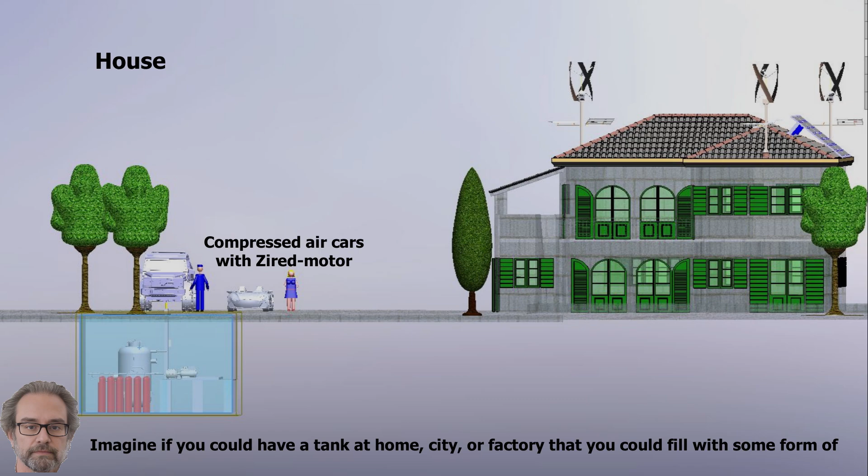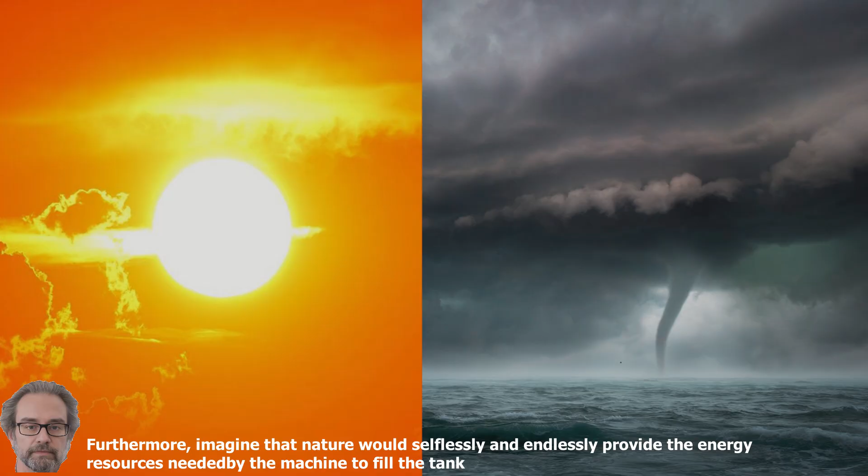Imagine if you could have a tank at home, city, or factory that you could fill with some form of energy 24 hours a day, 7 days a week, using just a new, near-silent machine. Furthermore, imagine that nature would selflessly and endlessly provide the energy resources needed by the machine to fill the tank, without you personally having to toil, compete, or pay for the supply.

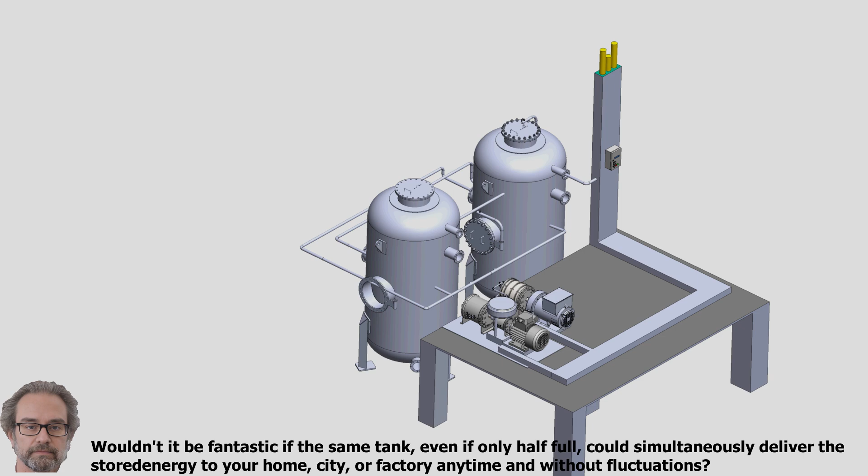Wouldn't it be fantastic if the same tank, even if only half full, could simultaneously deliver the stored energy to your home, city, or factory anytime and without fluctuations? And all this with the help of a second, also almost silent and very powerful machine.

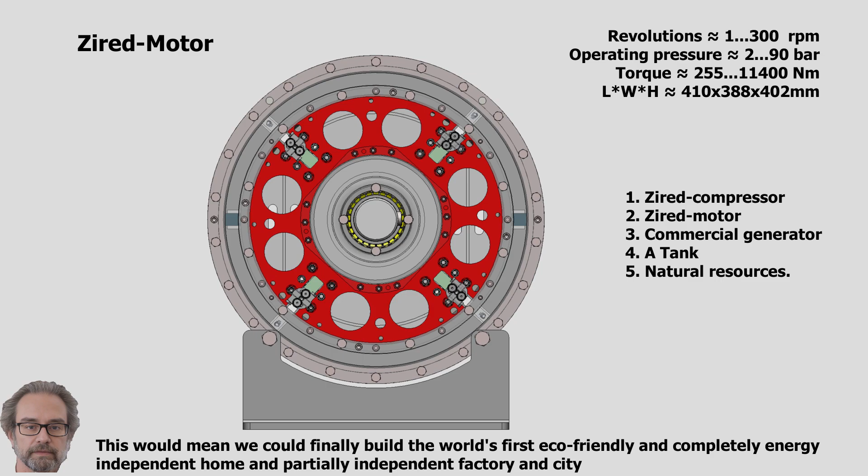This would mean we could finally build the world's first eco-friendly and completely energy-independent home, and partially independent factory and city, using just two specialized machines, the Zired compressor and Zired motor, a commercial generator, a tank, and natural resources.

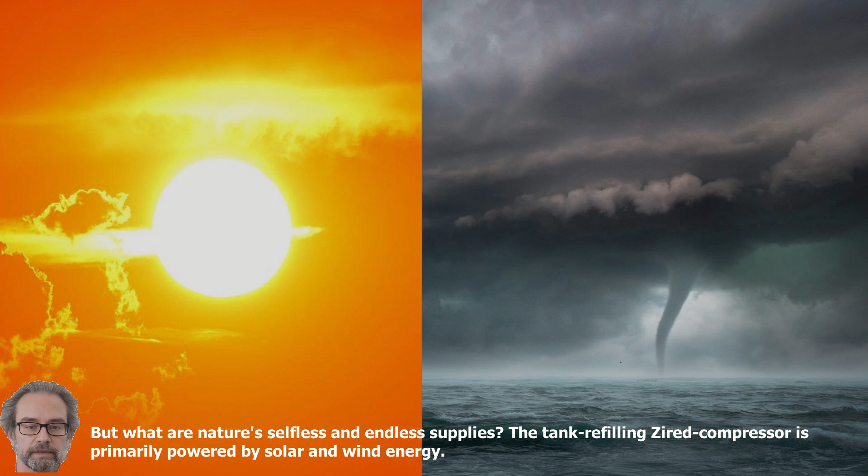But what are nature's selfless and endless supplies? The tank-refilling Zired compressor is primarily powered by solar and wind energy. But what kind of resource could the machine use to fill the tank?

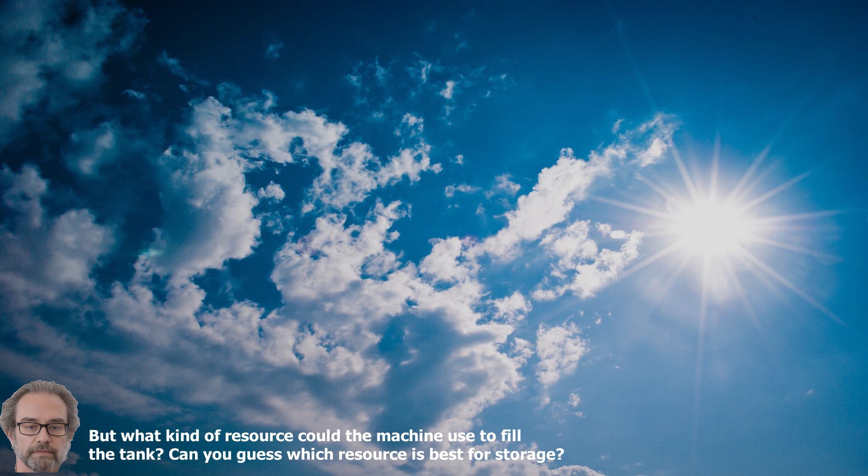Can you guess which resource is best for storage? I don't think it would be so easy for you, although according to the ancient Greeks, this resource is one of the four elements of the world and is also necessary for the survival of all living organisms. Yes, air is the best resource on planet Earth.

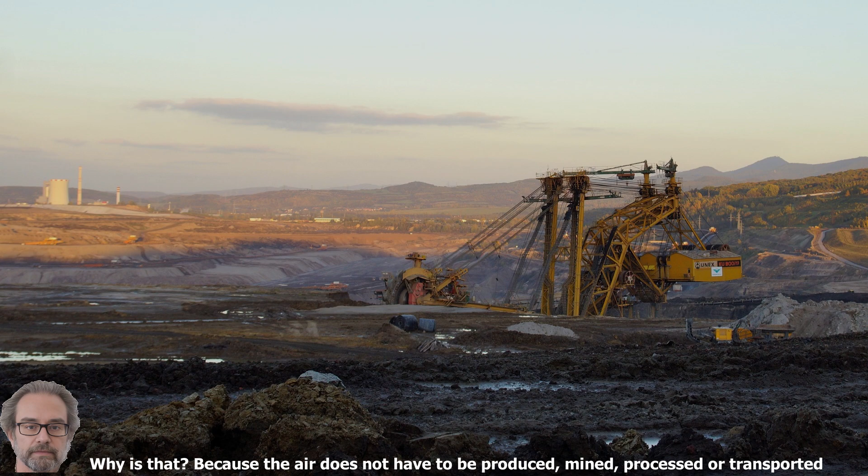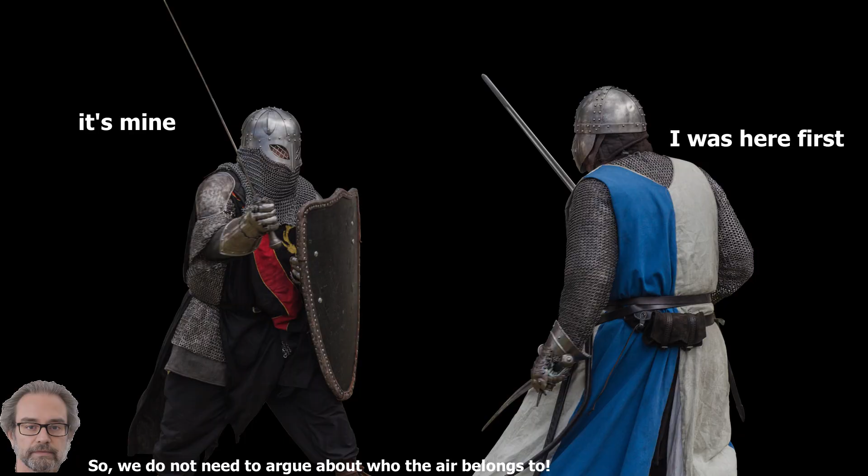Why is that? Because air does not need to be produced, mined, processed, or transported. Air is a gift from nature and is available in abundance. So we do not need to argue about who the air belongs to.

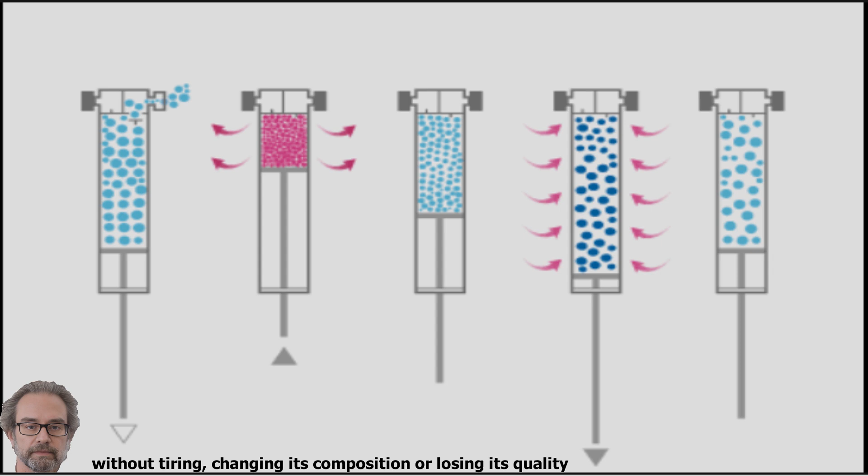However, the best and most important property of air is that it can absorb or release mechanical energy countless times without tiring, changing its composition, or losing its quality. This property of air inspired me and at the same time encouraged me to develop devices that can make optimal use of the properties of energy absorption and release.

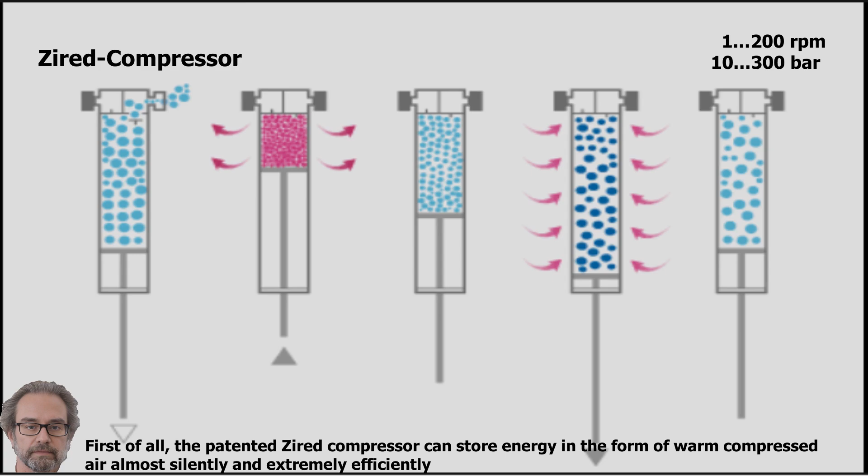First of all, the patented Zired compressor can store energy in the form of warm compressed air almost silently and extremely efficiently. Most importantly, the storage process completely balances out all the fluctuations that renewable energy sources inevitably have.

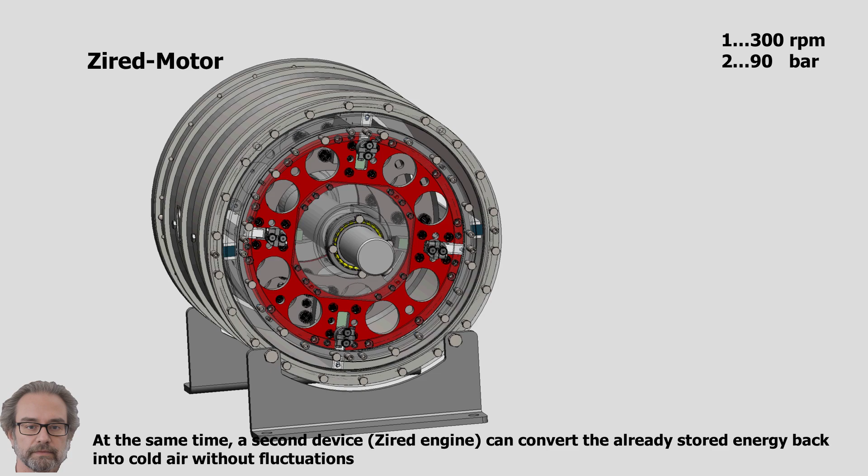At the same time, a second device, the Zired engine, can convert the already stored energy back into cold air without fluctuations. This can then drive a conventional generator or a compressed air car, if available.

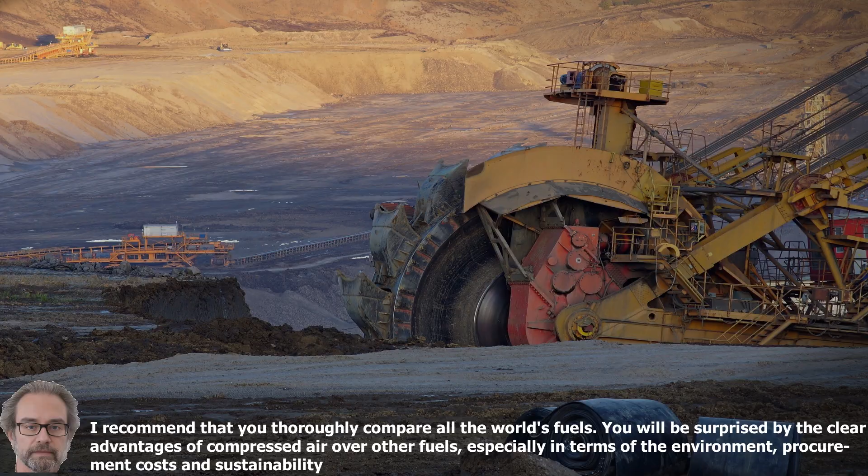I recommend that you thoroughly compare all the world's fuels. You will be surprised by the clear advantages of compressed air over other fuels, especially in terms of the environment, procurement costs, and sustainability.

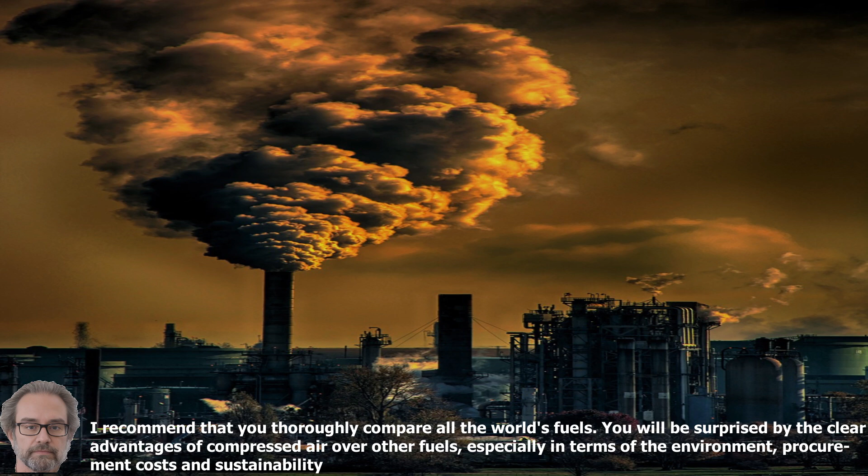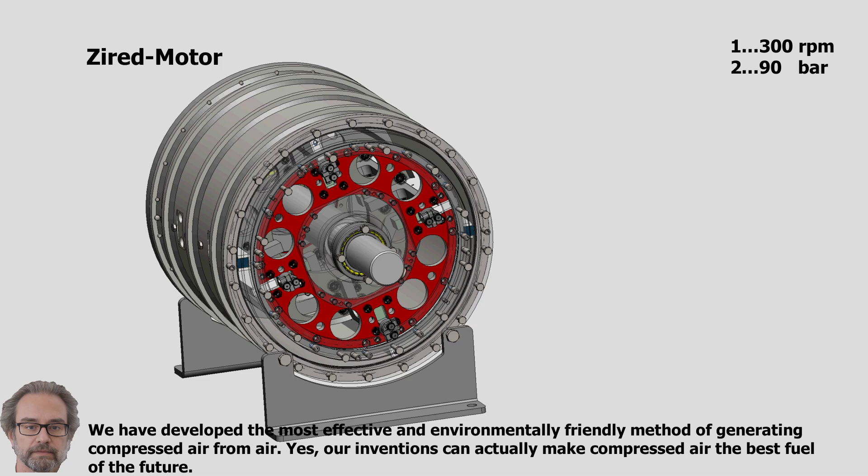We have developed the most effective and environmentally friendly method of generating compressed air from air. Yes, our inventions can actually make compressed air the best fuel of the future.

Our goal is, of course, to unite production sites with consumption sites in order to avoid energy transport. With the Zired engine and compressor, every consumer should be able to achieve energy and mobility independence.

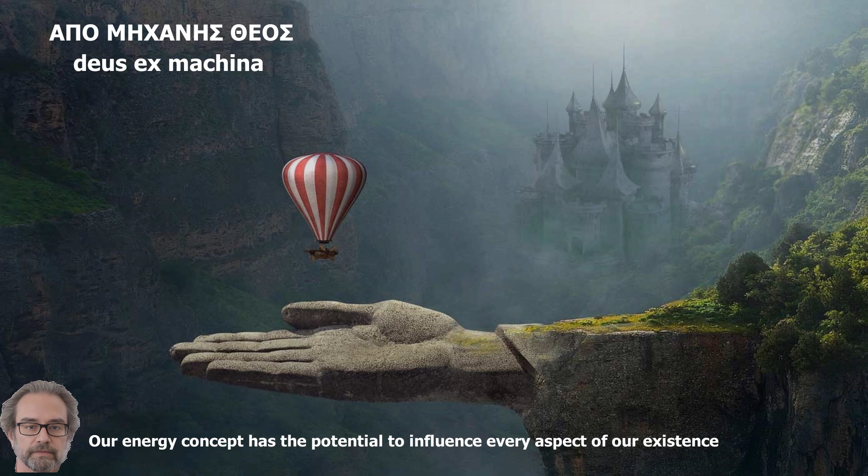Our energy concept has the potential to influence every aspect of our existence. In addition, it will be able to greatly reduce the dominance of combustion energy and resource wars.

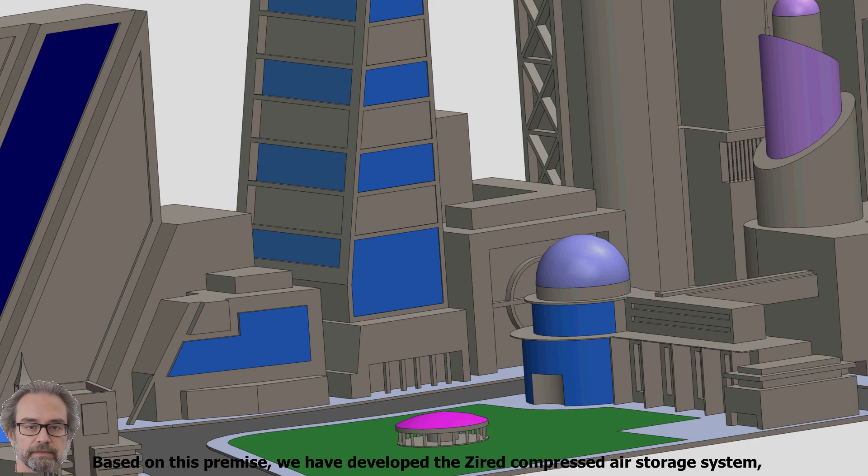Based on this premise, we have developed the Zired compressed air storage system, which is a long-term energy storage system that utilizes compressed air as its storage medium. Compressed air is a form of energy that falls under the category of potential energy.

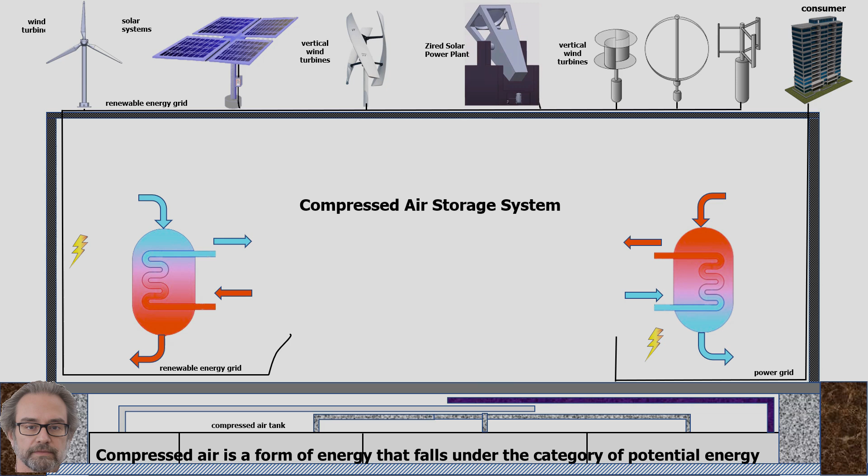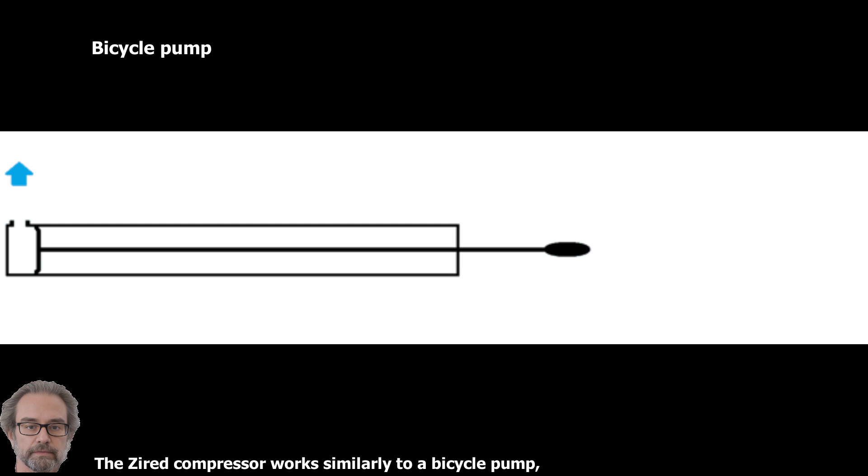We have re-engineered the previously inefficient process of generating compressed air. With the assistance of our two new machines, which have been granted a European patent, we have greatly improved the generation process. The Zired compressor works similarly to a bicycle pump, except that it moves in a circular motion instead of a reciprocating one.

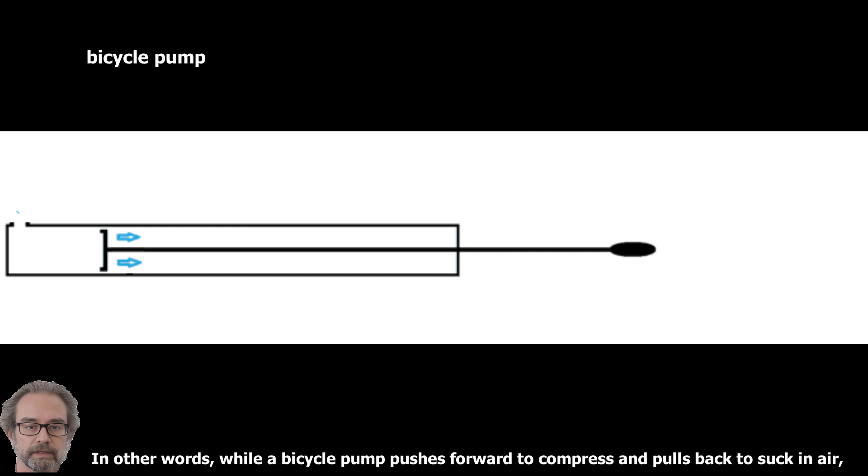In other words, while a bicycle pump pushes forward to compress and pulls back to suck in air, the Zired compressor instead rotates continuously in a perfect circle. This allows Zired to suck in and compress air at the same time.

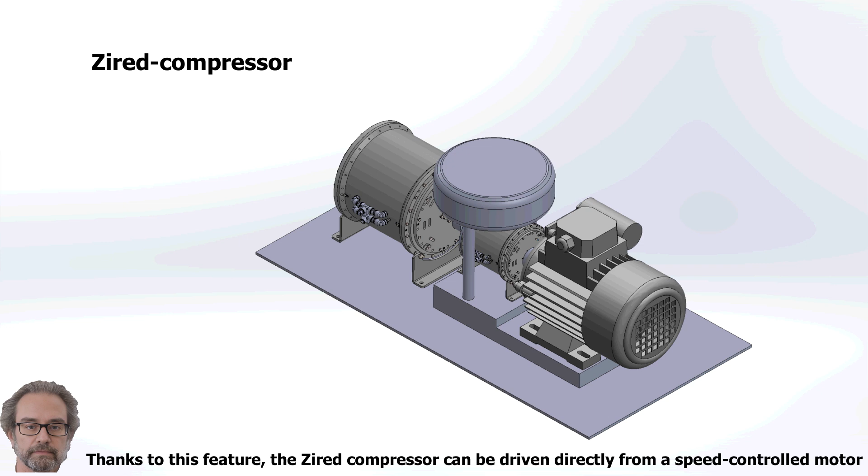The compression does not depend on the rotational speed, as the Zired compressor can compress air even at a single revolution per minute. Thanks to this feature, the Zired compressor can be driven directly from a speed-controlled motor.

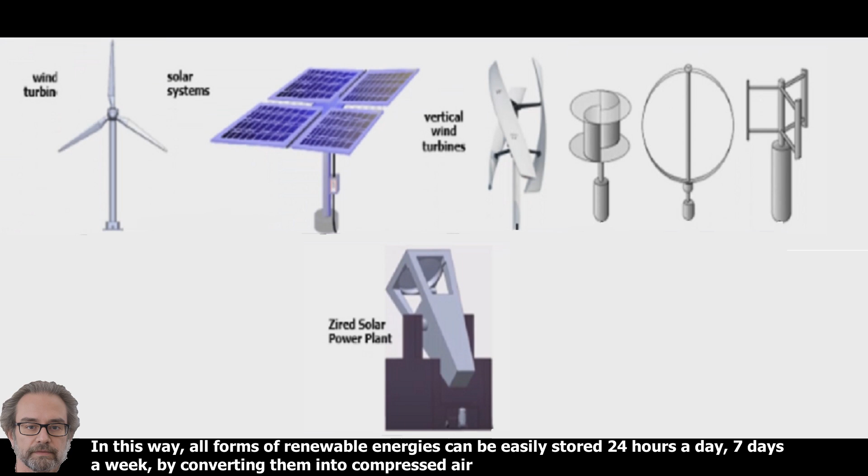In this way, all forms of renewable energy can be easily stored 24 hours a day, 7 days a week, by converting them into compressed air.

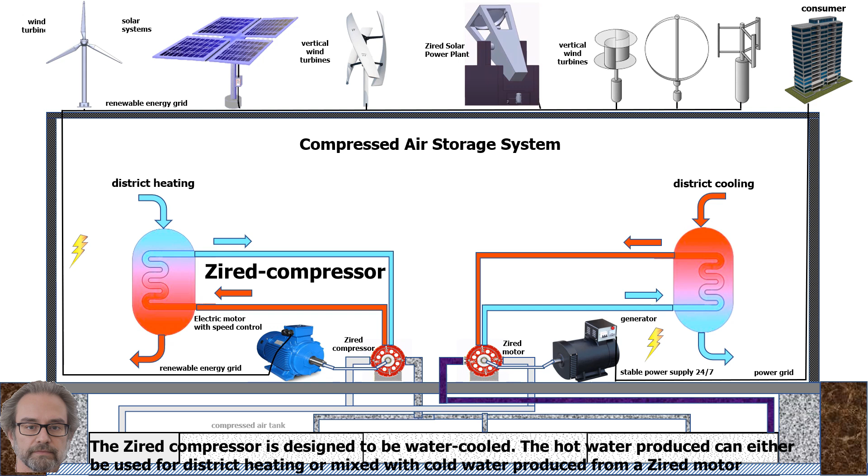The Zired compressor is designed to be water-cooled. The hot water produced can either be used for district heating or mixed with cold water produced from a Zired motor.

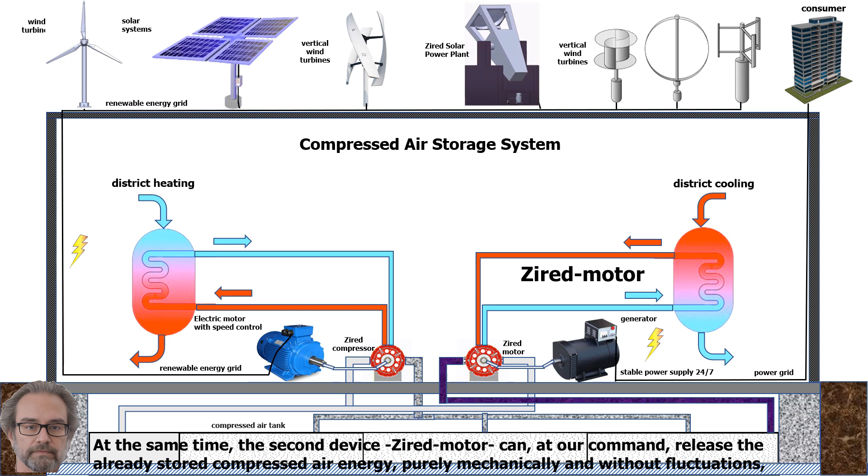At the same time, the second device, the Zired motor, can, at our command, release the already stored compressed air energy, purely mechanically and without fluctuations, in the form of cold air, thus putting a normal generator into operation, which in turn produces stable electricity.

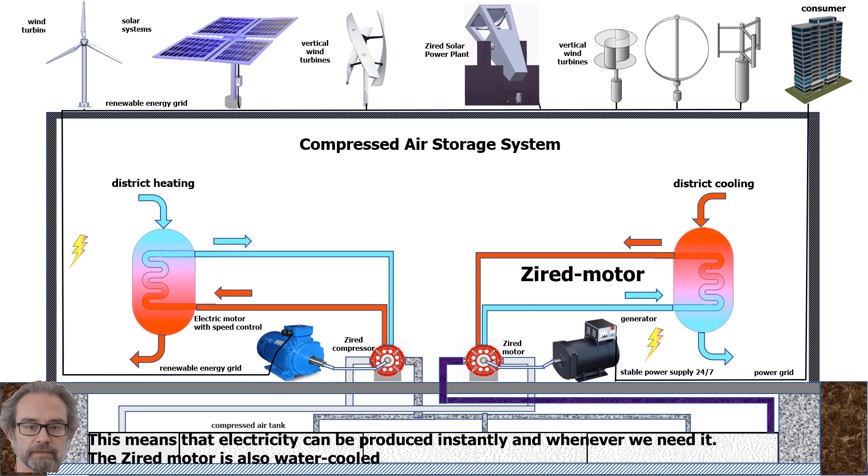This means that electricity can be produced instantly, whenever we need it. The Zired motor is also water-cooled. The cold water produced can either be used for district cooling or mixed with hot water from the Zired compressor.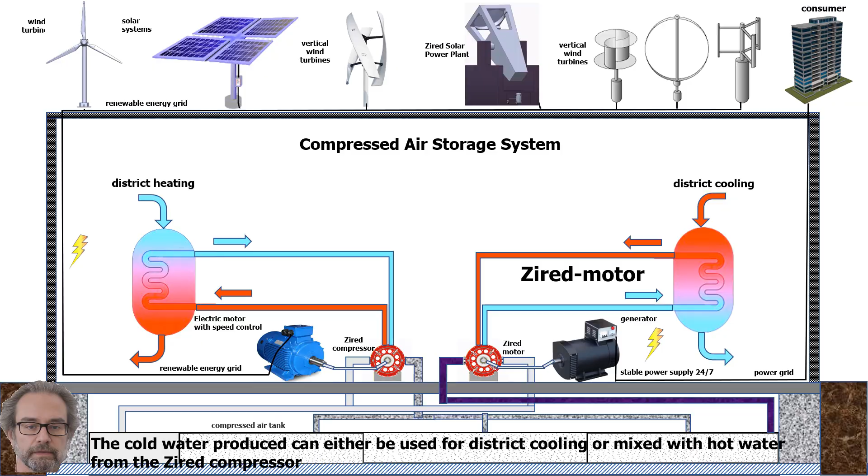If the underground compressed air tank is large enough, about 2,000 cubic meters at 300 bar, then the storage volume will be able to reach a capacity of about 1 gigawatt-hour, and with electricity recycling, even about 1.5 gigawatt-hours.

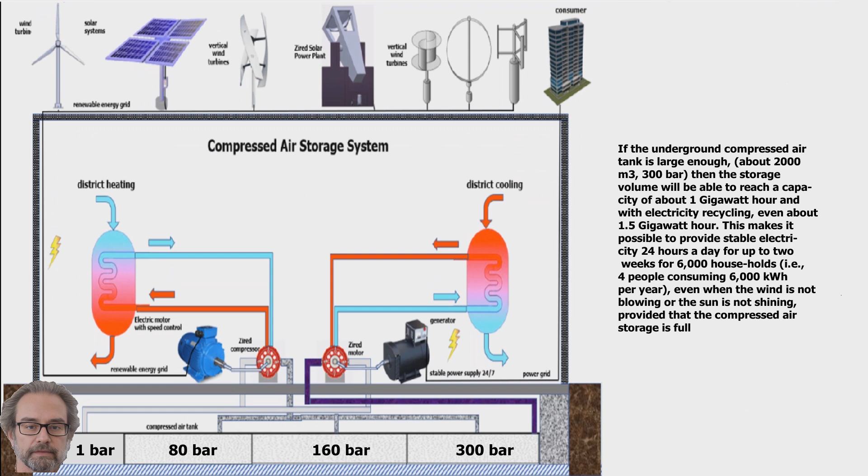This makes it possible to provide stable electricity 24 hours a day for up to 2 weeks for 6,000 households, i.e., 4 people consuming 6,000 kilowatt-hours per year, even when the wind is not blowing or the sun is not shining, provided that the compressed air storage is full.

The Zired compressed air storage system has the following characteristics: 1. On-demand power production. 2. Cost-effective construction. 3. It is possible to have variable energy storage and stable 24/7 power generation at the same time.

4. If renewable energy is not available for some time, the Zired compressed air storage system can still produce electricity for several days, weeks, or even months, provided that the storage capacity and daily consumption are adjusted.

5. The Zired compressors or motors used weigh only about 100 to 300 kilograms each. 6. Self-sufficient power supply is quite possible.

7. The simplified design of the Zired compressed air storage system makes it robust, relatively easy to build, and requires very little maintenance. 8. The system can provide district heating and cooling.

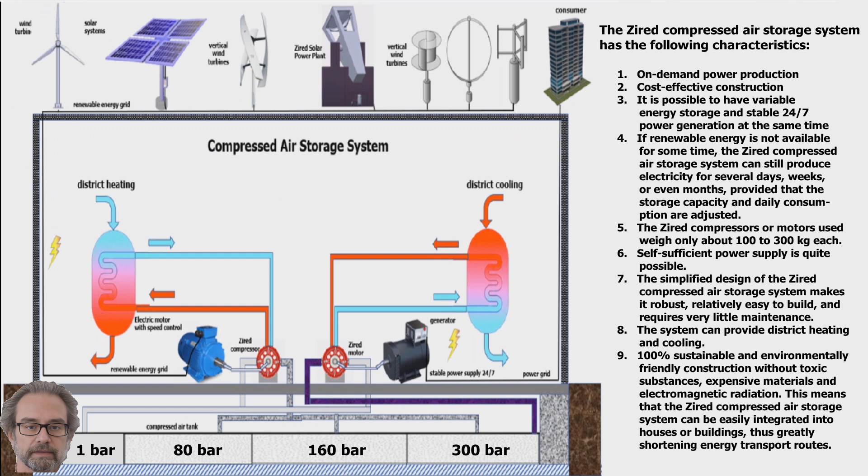9. 100% sustainable and environmentally friendly construction without toxic substances, expensive materials, and electromagnetic radiation. This means that the Zired compressed air storage system can be easily integrated into houses or buildings, thus greatly shortening energy transport routes. 10. Best value for money.

All these advantages of our designs fully support our claim that the Zired compressed air storage system will definitely be the game changer.